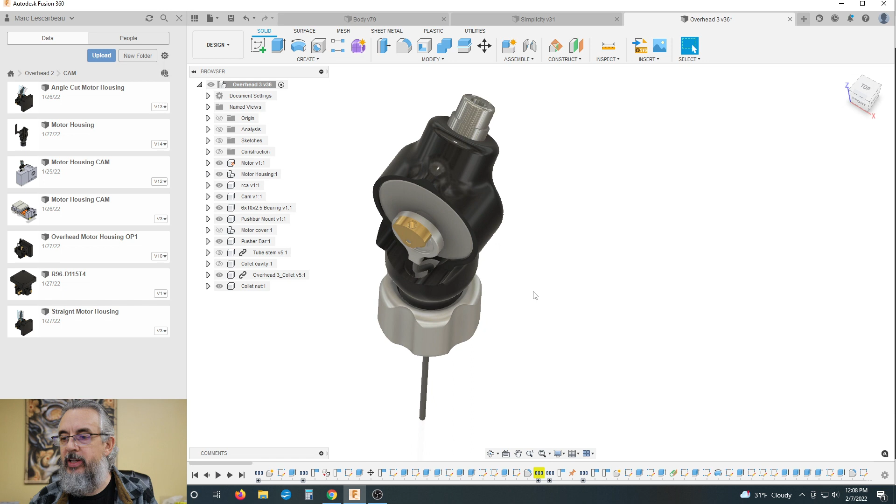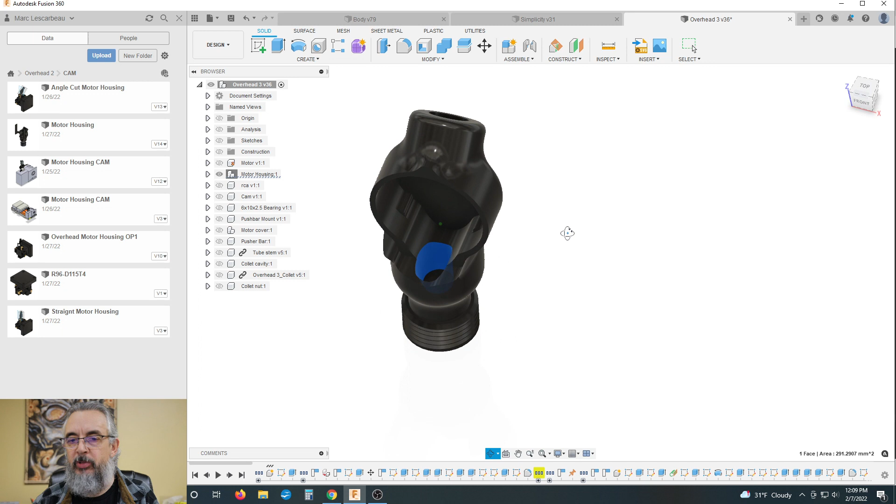So there was another thing I was having where, let me turn this off. This cavity here that I had created, let's just isolate this so we can see better. Okay, so this strange cavity shape here I have going down in there was a little bit of an extreme angle to machine comfortably, based on, I showed you guys, I think, the tombstone.

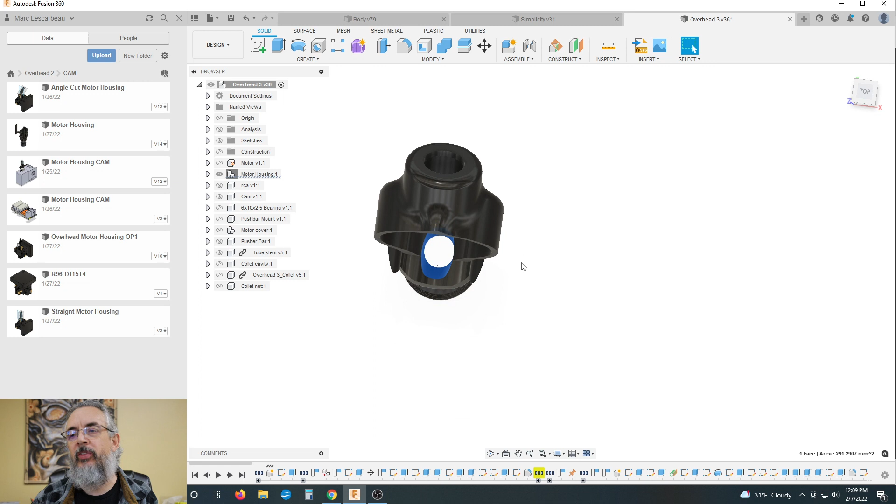It's a four-sided tombstone, which I can hold 4 parts, either 4 identical parts or 4 different parts for the machining process. And what ended up happening there was I was going in at such a steep angle that I was interfering with my ability to place a part on one of the adjacent sides of the tombstone. And because I'm still new to a lot of the fourth axis stuff, I was not getting the tool paths generated that I wanted.

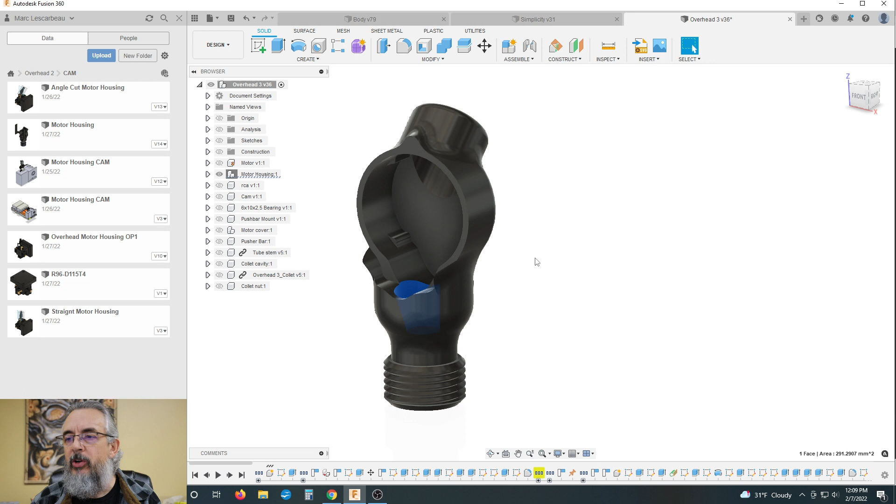So at that point, I just stared at it for a while, trying to figure out what I could do to alleviate the issues that I came across. And well, I went a little bit crazy. What I ended up doing was redesigning the entire machine. Now, everything is virtually the same. I made a couple changes that solve those 2 issues. So let me show you what I did. I came over.

I'm also, just so you can see here, kind of wrestling with the idea of machine name Simplicity. I don't know if I love that idea yet or not, but something that popped in my head. So that may or may not be the name of this machine.

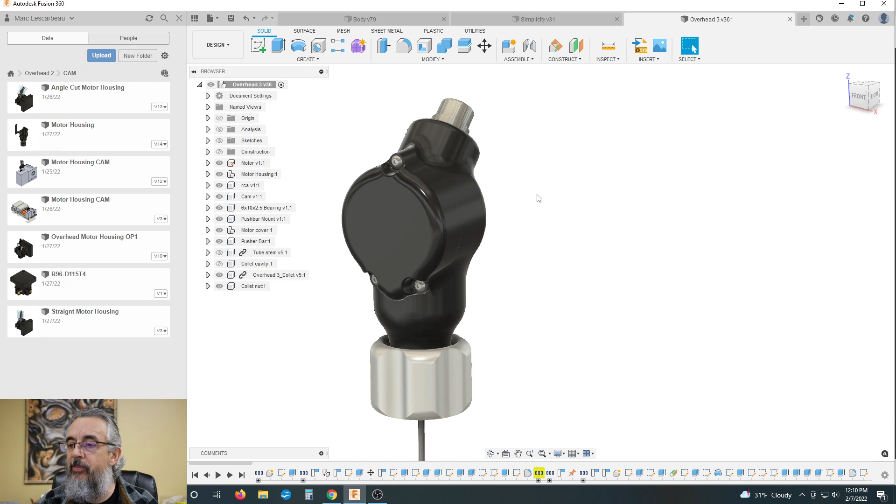Okay, so if we kind of go back and forth here, you can see everything is virtually identical. Same cam, same everything. Very, very close to the same exterior body shape, except for I have this new cover. And this cover is, let's see, a subcomponent of the body.

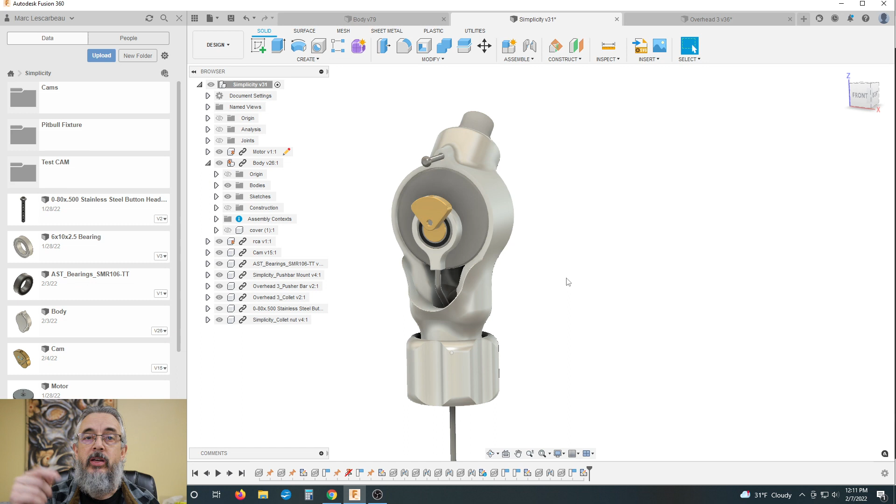And I also went about building this in a more proper fashion where each part is its own entity, and each one of these parts is dragged into this assembly, and you can see these little link icons. So each one of these is linked. So if I make any changes in any of these individual components, they will be reflected in the assembly, and vice versa. I can in fact go in here and edit any of these in place, and that will change the master file off on the left side, just as long as I save.

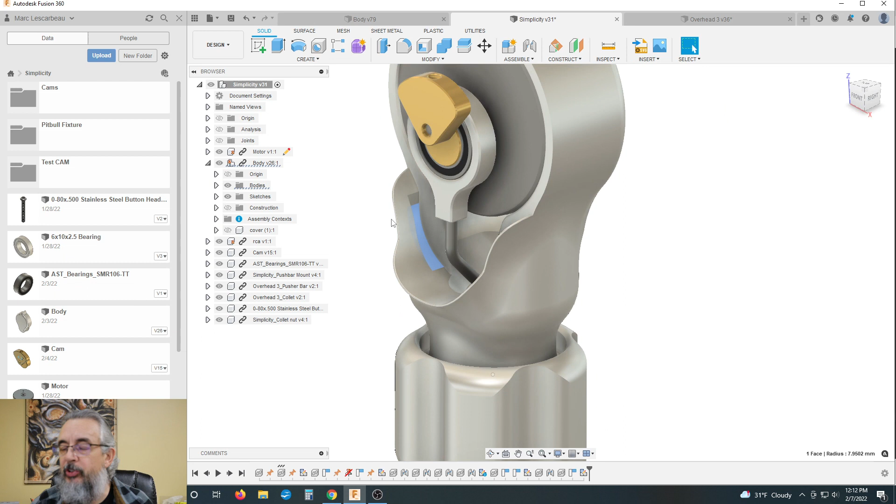Anyway, so what I have done here, it's kind of hard to see, but I've got this little groove down in here. I don't know if you can make it out, but it's a recess. It's a little slot, and basically it might be easier to show you the, can we isolate the cover? We gotta isolate the body, and then turn off that. Okay, so now you can see the cover here.

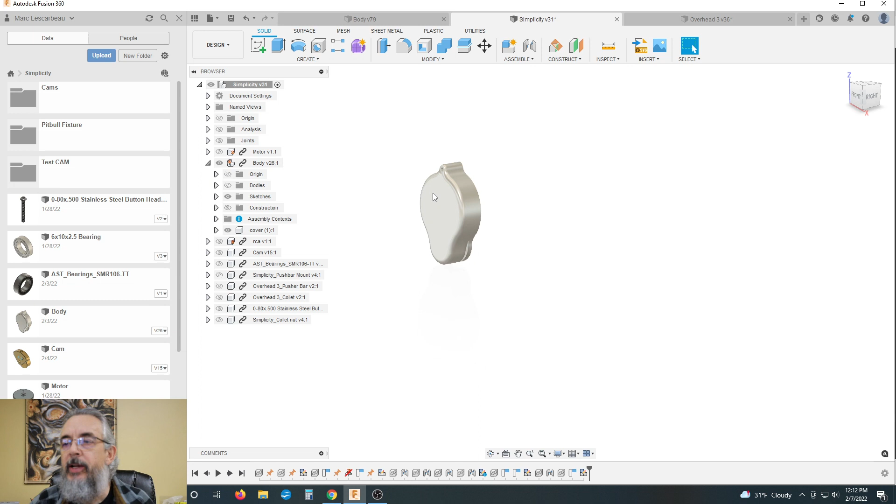So these little tabs, as we'll call them, or extensions, they're going to guide the cover down into the motor housing or the body. I think I'm calling it just a body now. So that's going to slide it down, and that's going to hold the lower part of the cover in position, and then the whole thing can be retained with just one single screw at the top. So that is, in my eyes, just simpler. Less moving parts, less things to buy, less things to machine, whatever.

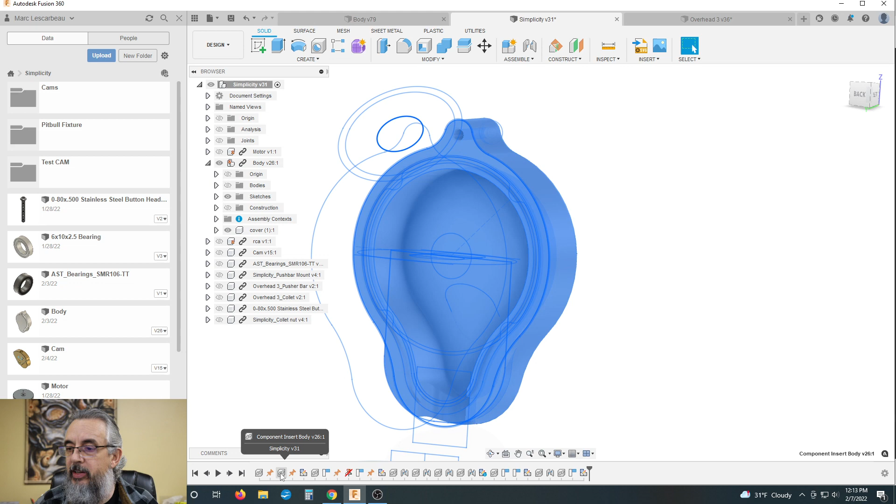And also, I don't know if you're going to be able to see this terribly well here, but this slot here, the wall thickness on the cover is a little thicker. I increased that, and I created this slot that runs around pretty much the perimeter of the motor.

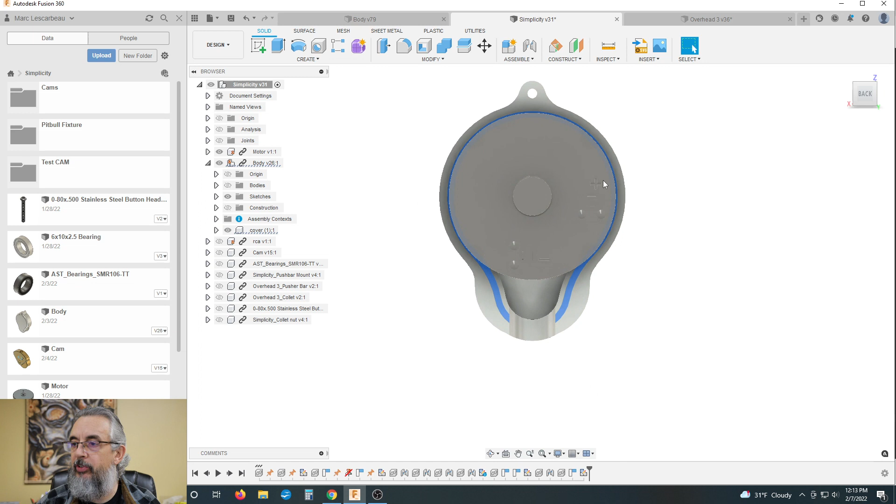I'll pop the motor on there and just show it to you from the back side. So that slot is just on the inside edge of the motor. It extends outward just a little bit, and what I'm going to do with that slot is I'm going to buy some O-ring material.

You can buy that extruded round rubber, I don't want to say tubing, rod, but it's obviously flexible. I'm going to buy that and cut that to length. I can't do a complete one all the way around because we have the push rod bar and the push rod moving up and down, so that would interfere with that.

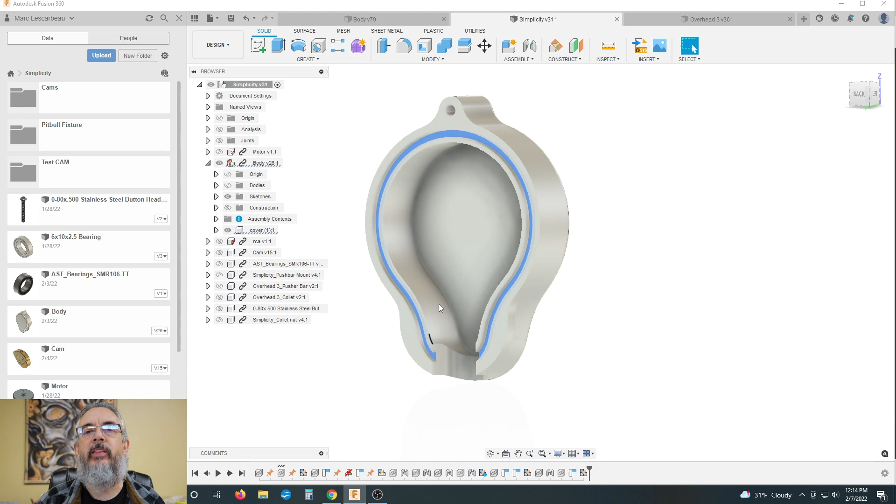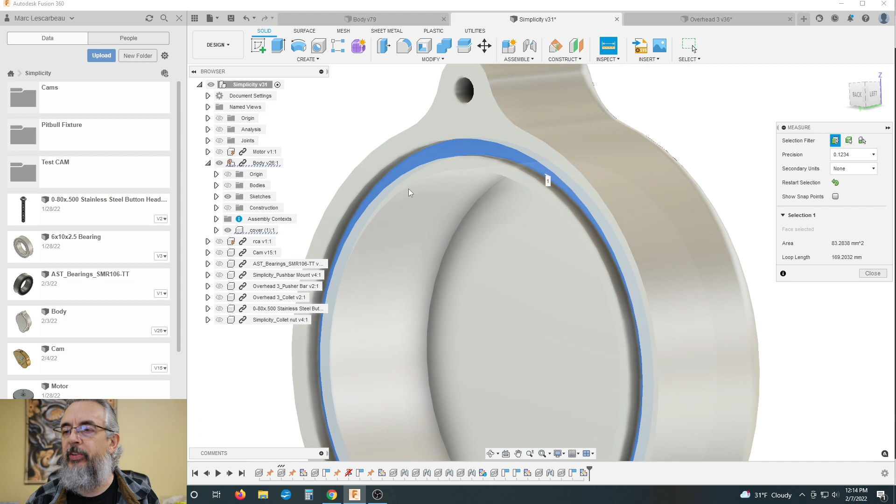But what I'm going to do is cut that to length and press fit it into this slot with the O-ring material sticking out the face of that just a few thousandths, probably 5 thousandths, 8 thousandths, in that neighborhood. I can't remember the exact depth. This will probably change once I get the part made, but right now I have that set to 0.9 millimeters deep. I'm going to buy 1 millimeter material, so that's going to leave 0.1 millimeters of O-ring material sticking up

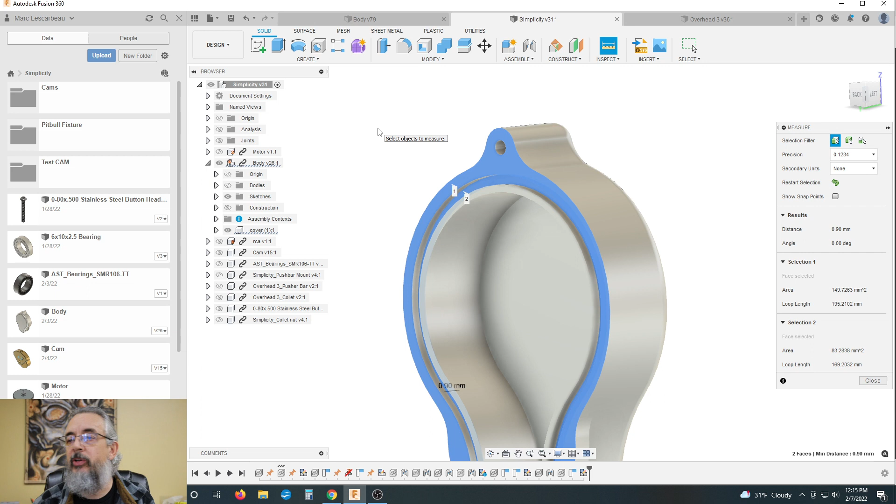out of the housing. That's going to press directly on the face of the motor, and that's 0.1 millimeters, about 4 thousandths, roughly the thickness of a sheet of paper, and that will compress as the screw is tightened down in the upper hole. So that is going to stabilize the motor within the housing now. The motor cannot rotate due to the tab feature that we put into the housing or the body itself.

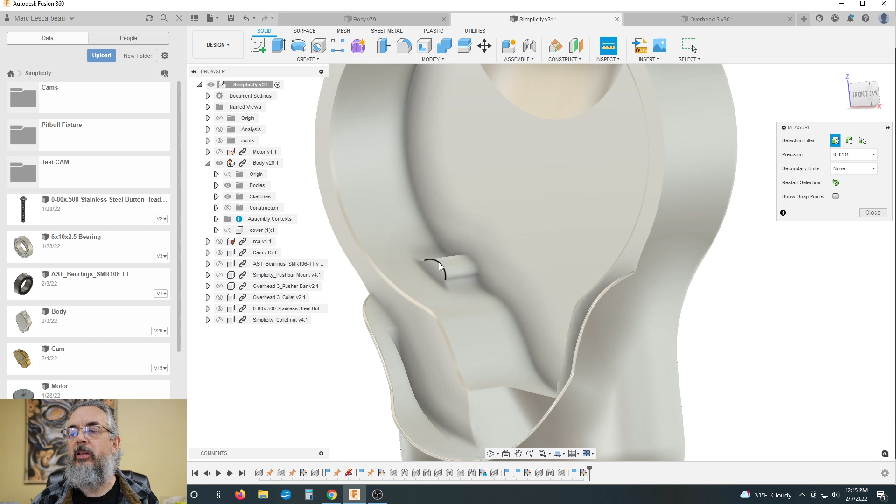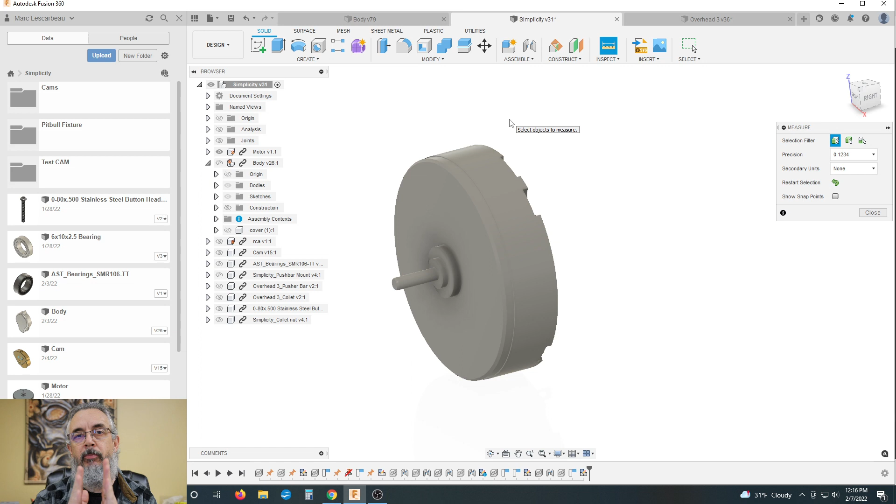These little risers not only hold the motor up off the back of the housing, but they also interact directly with these little recesses in the back of the motor. So those tabs will keep the motor spaced off the back of the housing, keep it from rotating, and then the O-ring gasket pressing on the front of it is going to hold it in place, completely stationary.

So without any additional fasteners, screws, or bolts to hold the motor down, all those problems are solved. I've isolated that in time and space right there, and it theoretically should not move. And I can adjust the pressure on the motor by just changing the depth of that O-ring slot.

So that's it. I did make some changes while I was not recording because I was home and I don't have this whole recording setup at the house. So hopefully you guys like what you see here. I think it looks a little cleaner, a little more streamlined, and a little easier to manufacture.

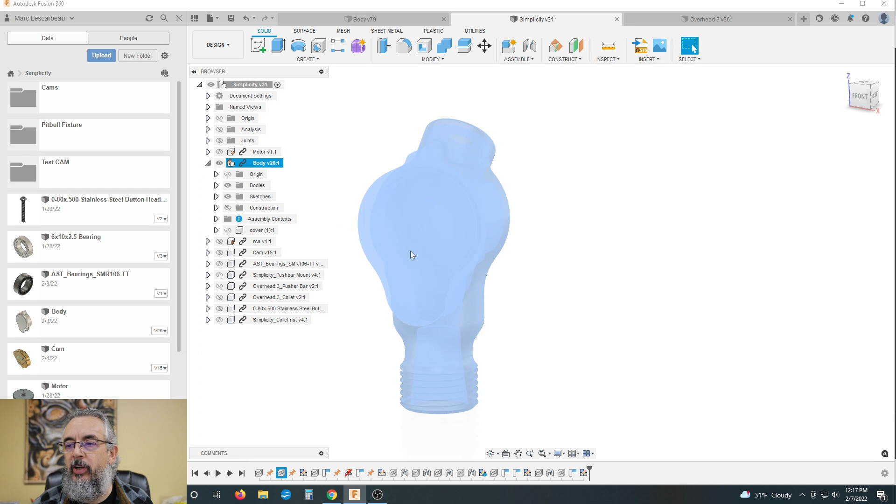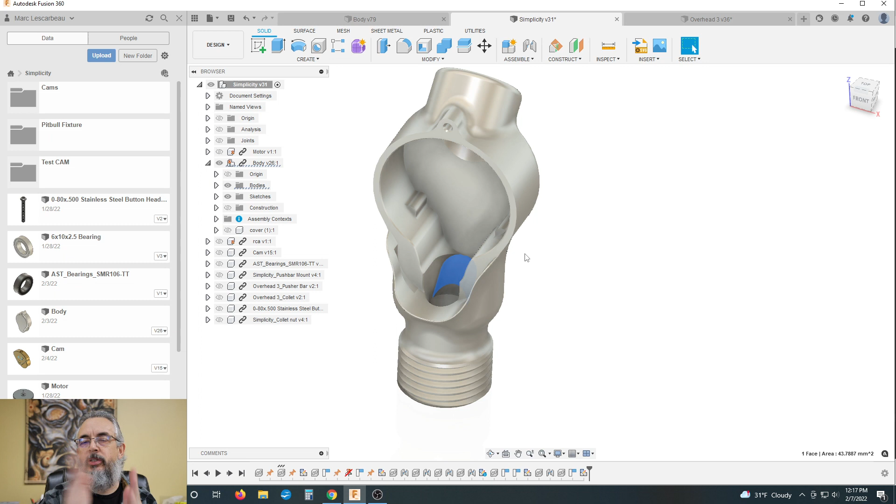Actually, let's look at this one more time without the cover on. You can kind of see I went with a simpler feature here for the clearance for the push rod mount and push rod to go down. This face here is 45 degrees between the vertical and the horizontal faces. 45 degrees is an easy angle to access without creating too much problem with the tombstone setting. So that's how I resolved that.

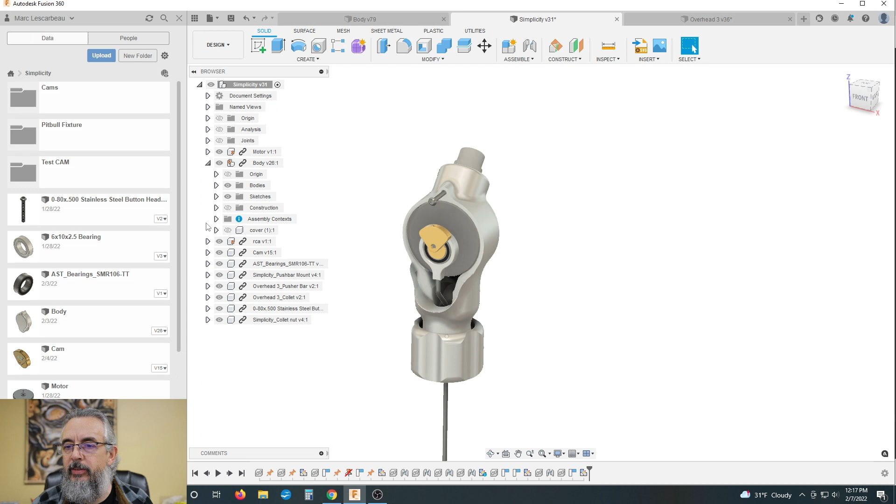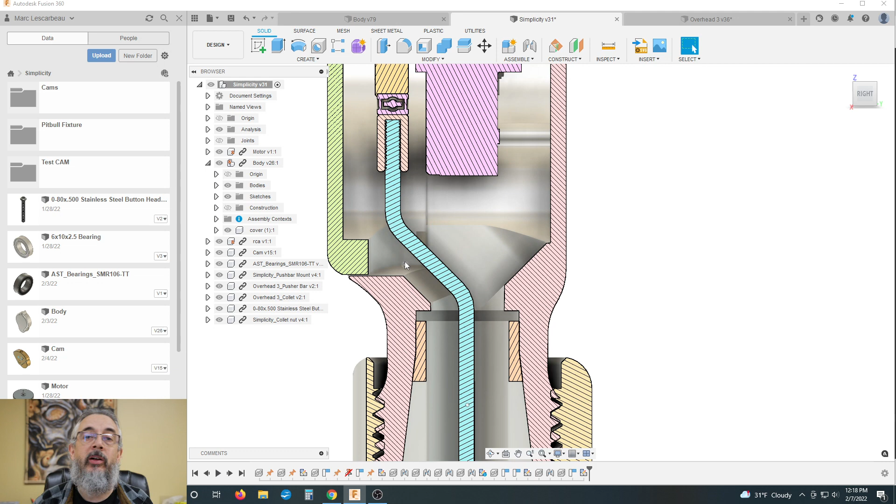And let's see. Isolate all, everything's back on, covers on. Let's look at the side view and turn on the analysis. You can see that the 45 degree angle slot here, because I have a 45 degree angle bent into the push bar, is fine. And the cam in its fully downward stroke leaves me a good millimeter and a half, or closer to 2 millimeters, of vertical clearance. So there's no chance of anything hitting or binding on that.

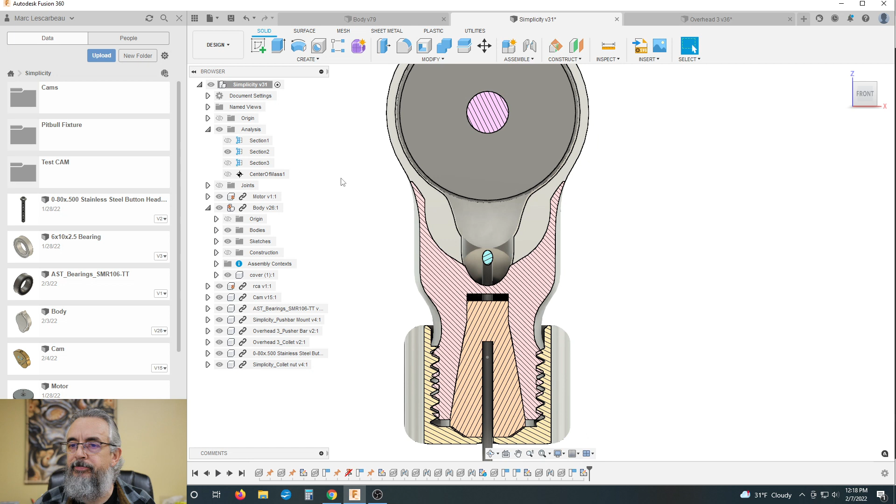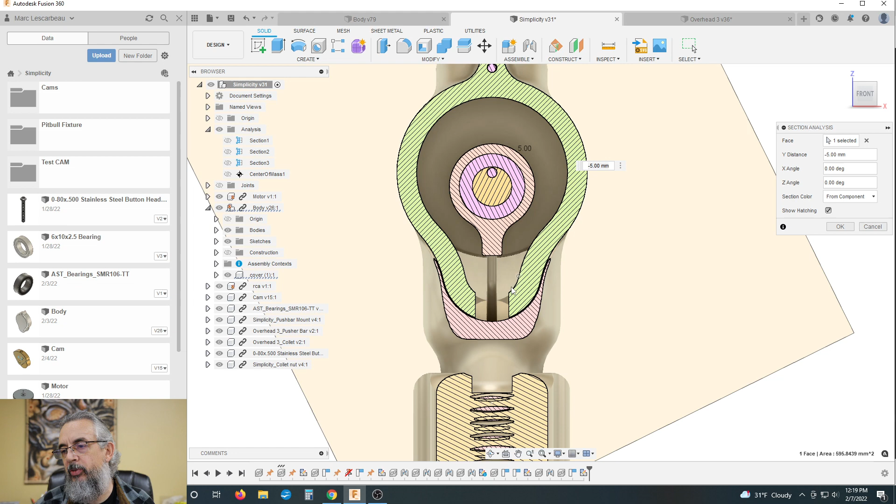And what's the other sectional view I have? From the front, you're not really going to get a good look at that, but I can quickly create another sectional view based on that feature, and that's a pretty good look there. So the bar, even when it's far off to the side over here, is going to have plenty of clearance coming down at this angle and this angle, and should be just fine.

So that's what I've done. I've made a few modifications, but all the mechanics are basically the same as where we stood. Everything I've done is mostly visual, other than the slotting mechanism to retain the lower part of the housing or the cover, instead of having all the additional bolts and holes to drill and tap and parts to purchase and lose and more things to go wrong. I like things done simply.

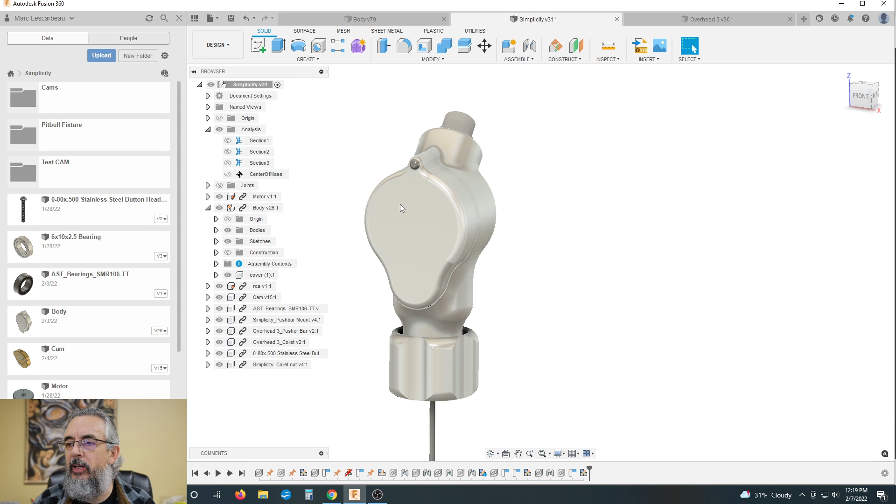So now, let's take you into the next step. All right, I started mocking up some of the stuff before, but this is where I'm at at this point in time.

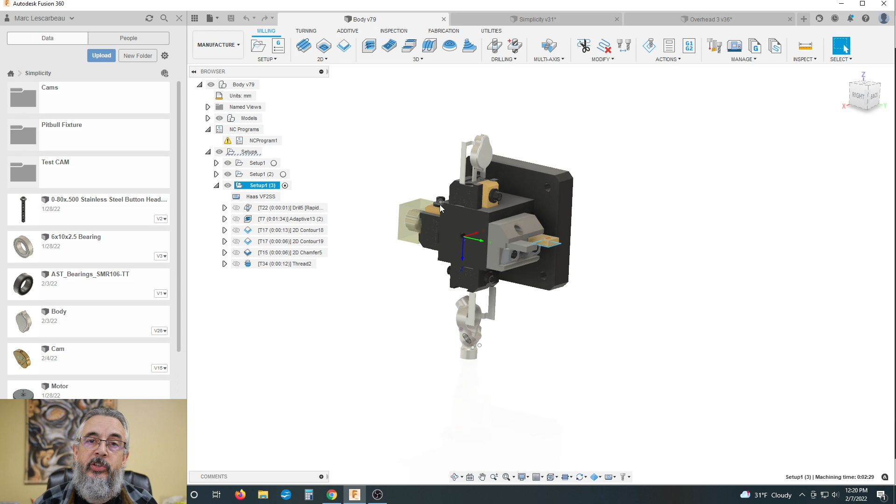Strategically planning to machine all 5 machined components for this machine in one setup on the new 4th axis rotary and tombstone. In order to do that, this only has 4 sides and we have 5 parts we have to make.

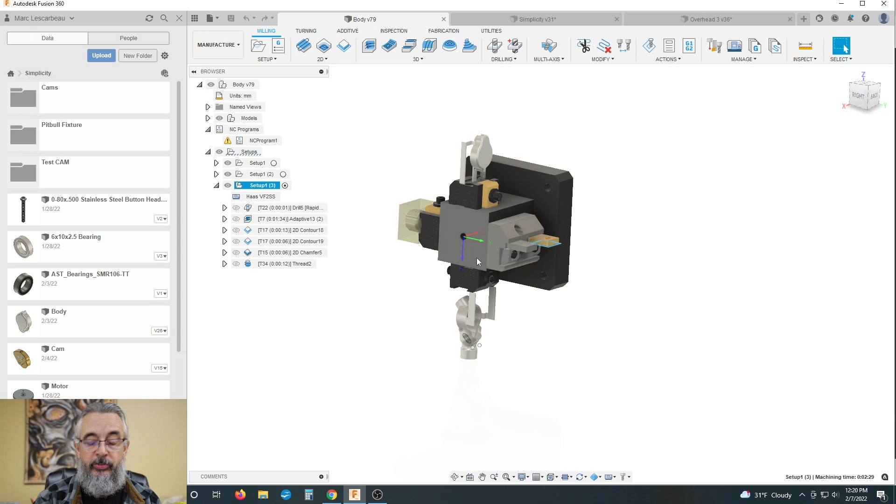Well, 6 parts because the pusher bar needs to be made, but that's not really a machined part other than the threading or the press fitting or however I want to attach those down the road. But that is really buying 1.5 millimeter rod in a hardened state, and that's going to be done with a small tool that I'm actually going to build to put the proper angles and cut to length.

So those are all identical, and I may have to make a couple different lengths of those based on different manufacturers of tubes, but I may or may not. I may just support my own tubes and products, and then that's that. If people put up a big stink, then I may make another length of pusher bar. But my job is to work around the things I manufacture and some industry standards, but not to bend to other people's or other manufacturers' wishes.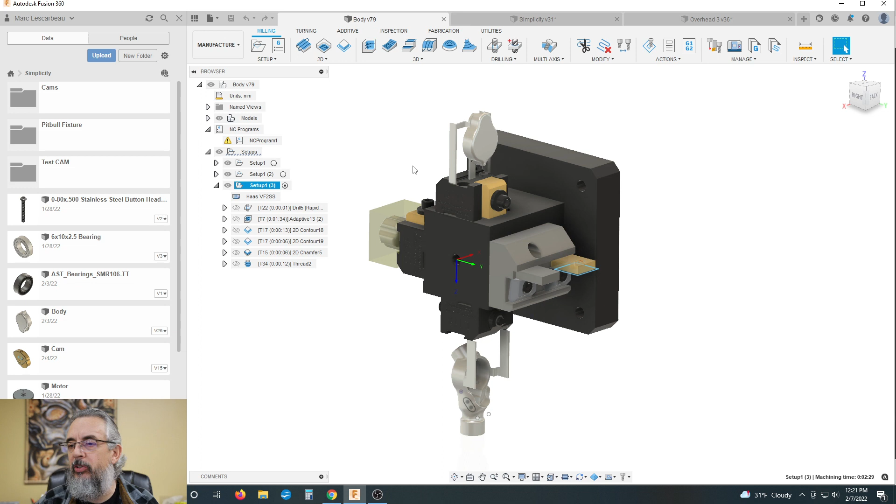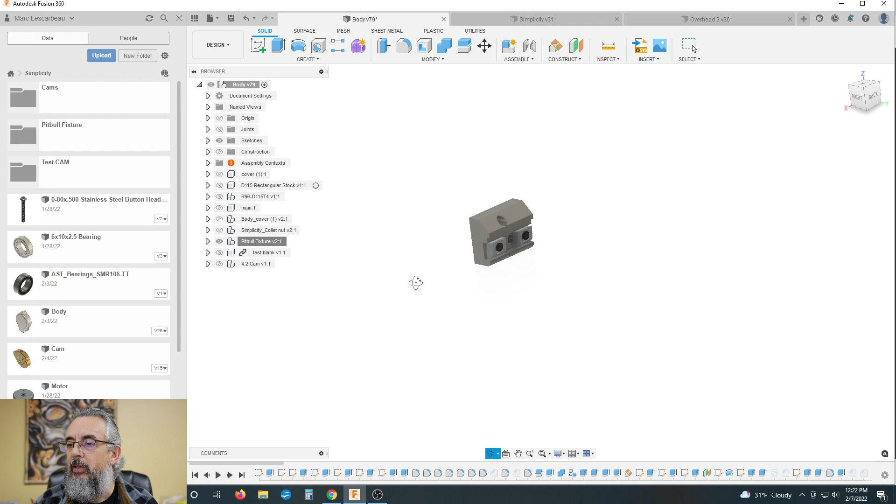Anyway, so this is what I've done. I've actually removed one of the dovetail vices from one side of the tombstone. That's easy enough to do. Let's see, go into the design phase here. And what I've done here is I've built this component here. I haven't built it yet. I've designed it.

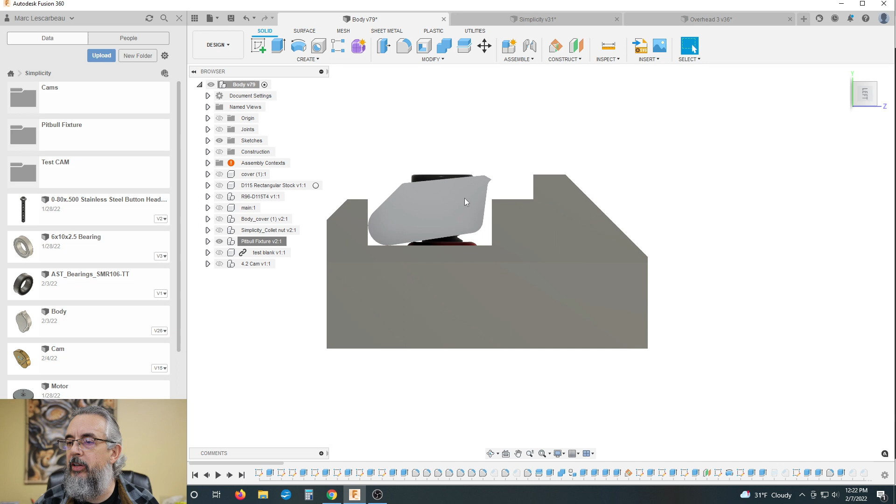These are some little clamps, super powerful, strong little clamps called pit bulls, made by a company called Mitee-Bite. I've been using their various products for years, and what you see here is a downward force, and it basically compounds the angular, uses leverage to put into the part that's being held. It has a knife edge. It's actually going to dig into the material that I'm holding.

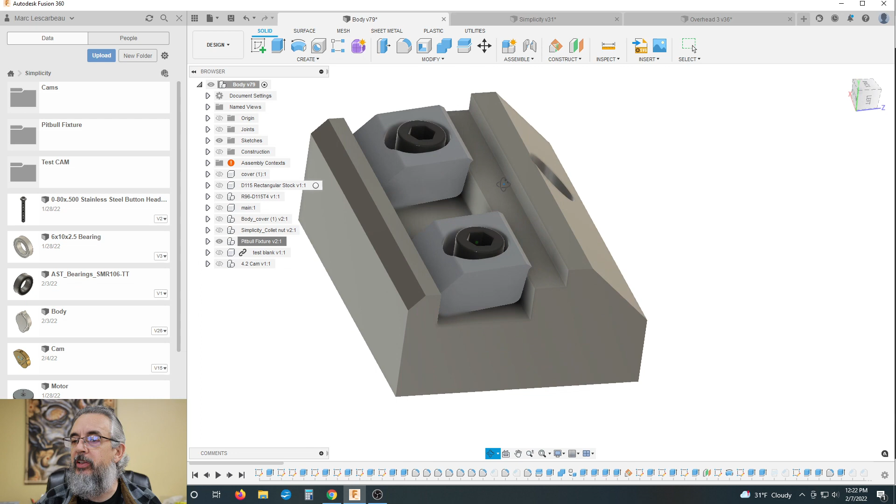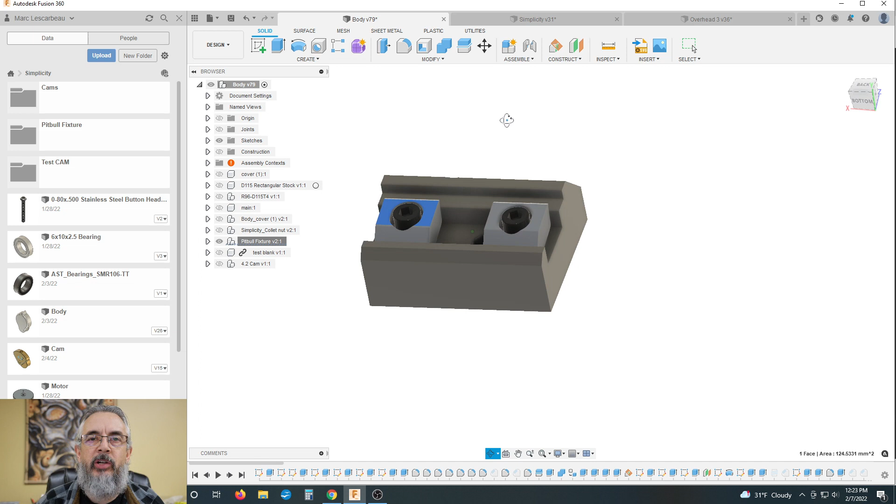Basically, I will maybe put in a couple dowel pins to indicate these, because I think I'm going to use 3/4 inch material on these. But I don't really need to, because these faces on these pit bulls are 3/4 of an inch, so I can quickly indicate raw material in there, close enough for government work. The way I plan on cutting those, it's not going to make a big difference whether it's 10 thousandths off one way or the other, or more, because I'm going to be cutting out of the center of the material anyways. So that's what we've done there.

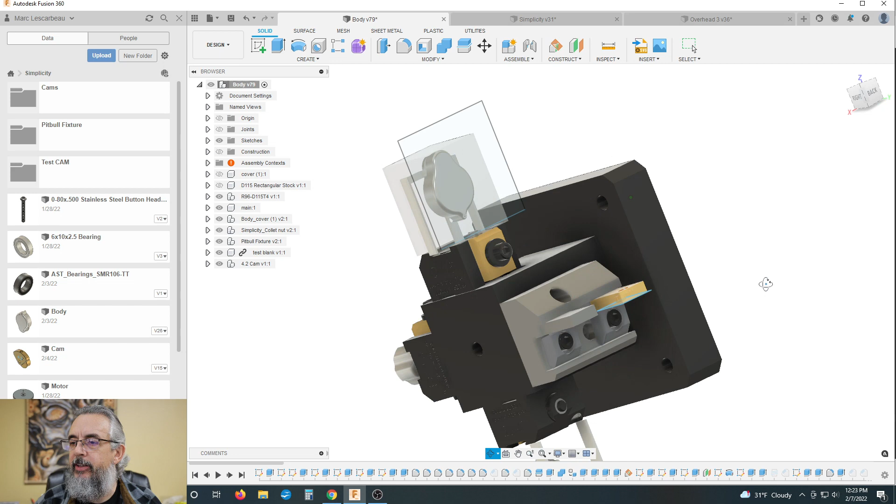Turn everything back on, and you can see I've created the various raw stocks that I need, the right sizes for each component. I have them spaced off of the dovetails far enough so I can machine all the way around them without cutting into my fixtures. A couple of these are turned off, so you just see a part hovering in the area. But if you could just picture another block like this, a little shorter over here, and that's what you get there. You've already seen what I was kind of doing in the last video with the block for the body, which is the most complex part of everything.

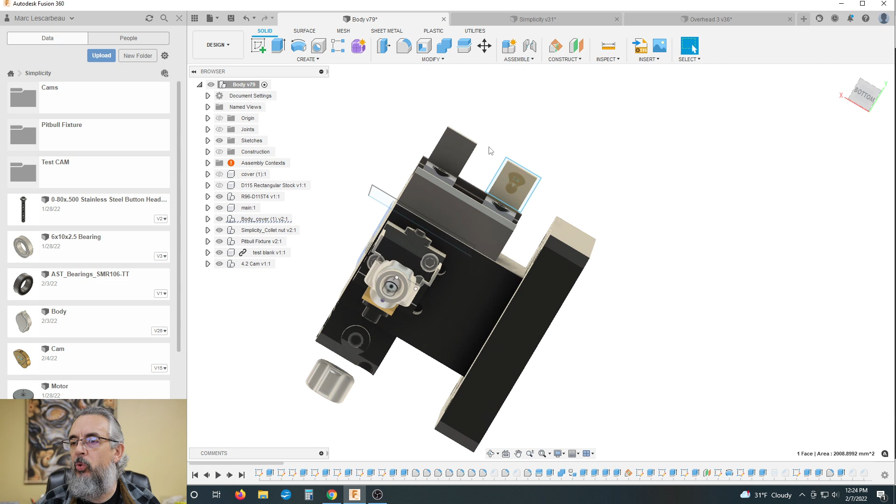And then this will hold the brass raw material for the cam and the aluminum raw material for the push bar mount. So basically, I will set up all 5 components on the tombstone, and in a 2-jaw vise next to that, I'll make some soft jaws that will hold the 3 blocks of aluminum that I'm going to use for the body, the cover, and the collet nut.

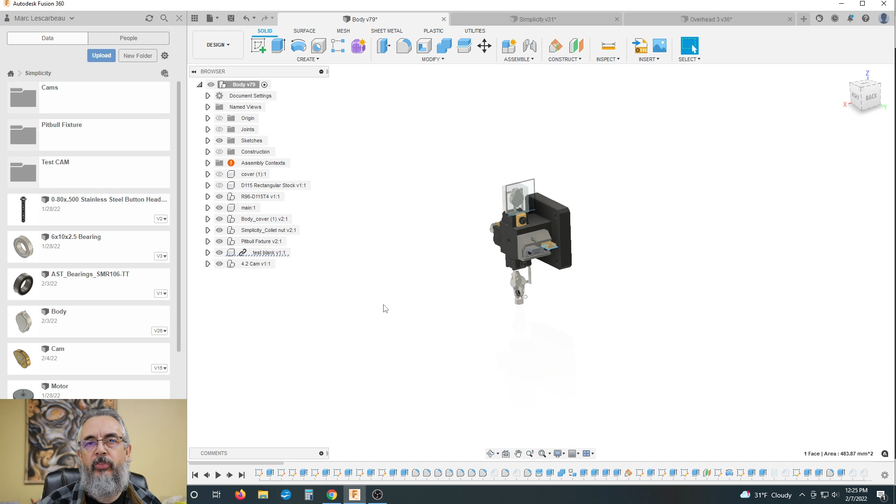So those 3 components will be held vertically, and every time I press go to start a cycle on the machine, the tooling will come in. It will cut the dovetails on the raw blocks so that those parts will be ready to go into the dovetail feature on the next cycle. And then the raw material that is in the dovetail, each one of those will be completed, all machining operations completed on those features in that one cycle.

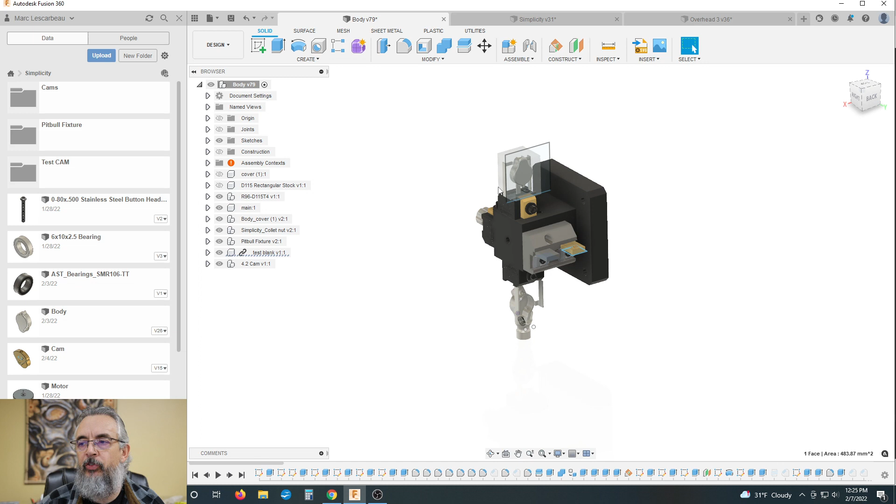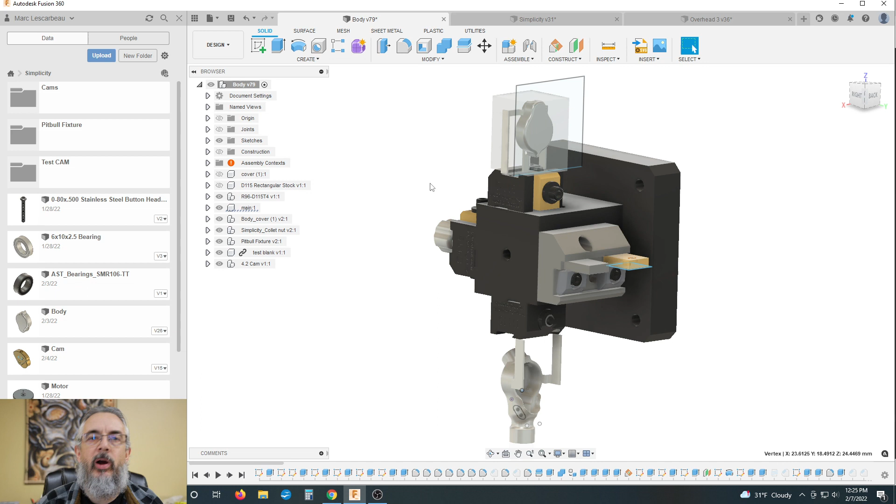So every time the operator opens the door of the CNC, first thing they're going to do is snap off each of these components off of the tabs and the arms that we have left in there. There'll be tabs on the smaller components too. Positioning these tabs in such a way where they're going to be so minimal that it's not even going to require another machining process after this is done, because all of my tabs are going to be done on flat surfaces.

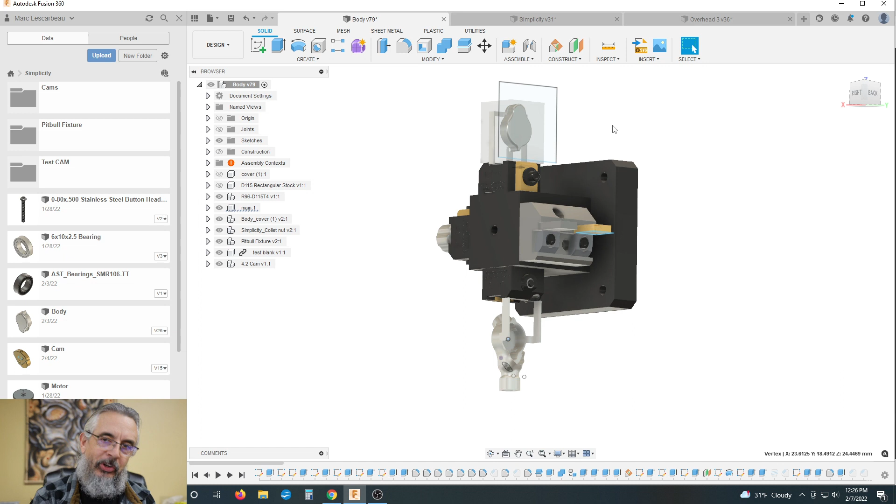Basically, next to the machining center, we're going to have a piece of perfectly flat glass and a very fine emery paper, because I'm only going to have a few thousandths of an inch of material, just holding the flat surface on that emery paper and very gently sliding it around and looking at it until it's smooth down to the basic flat surface. And then those parts will be completely ready to go into the vibratory tumbler, tumbled, sent out for anodizing, and eventually assembled as a machine.

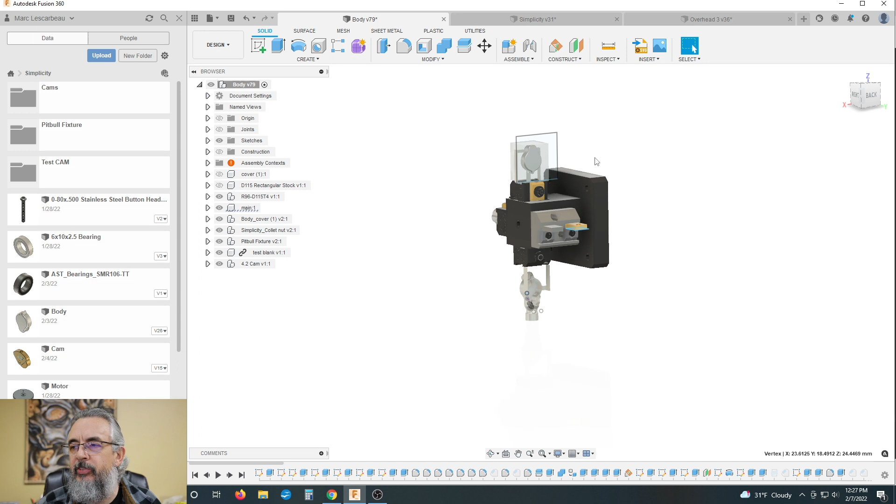But what I like about doing it this way is every time the machine runs and shuts off, there's enough components, other than the actual bending of the pusher bar, to assemble a complete machine. I'm just sort of guesstimating the run cycle time to be about an hour-ish. Could be less if I really get into detailing the operations and optimizing those for best speeds and feeds, which I will do to some degree, but I'm not going to worry about saving 1 to 2 minutes on a cycle time. I'd rather just ensure better tool life and less stress and wear on everything involved.

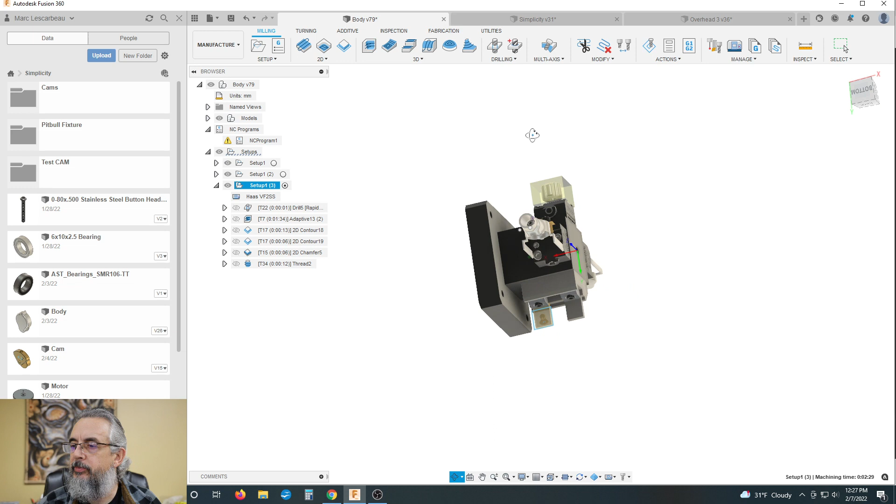So, but let me show you now a little bit of what I was talking about here. It's the best way to look at this. Let's get this roughly at 45 degrees here.

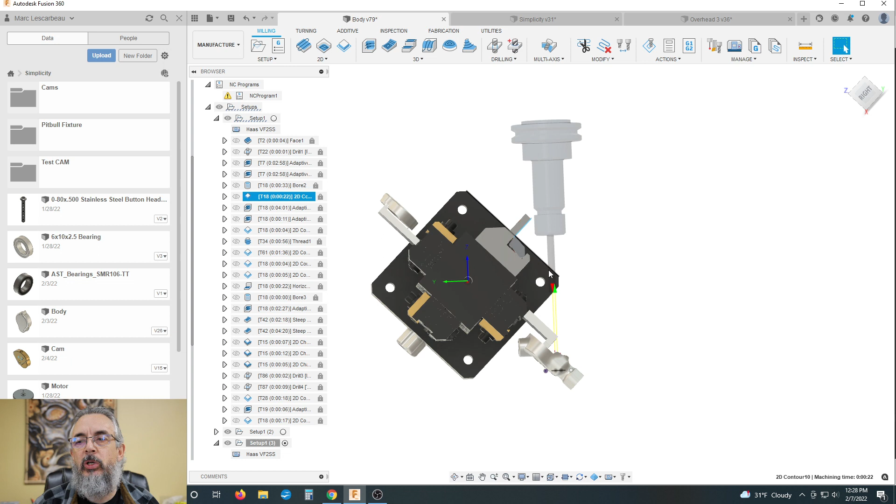Okay, that's approximately 45 degrees. Let's open up this first operation, and I believe this is it. Yeah, this is the tricky one. I've actually had to order some special tool holders. I've just placed an order for a few more $1,000 worth of special tool holders and very special tools to be able to make these components all in one shot.

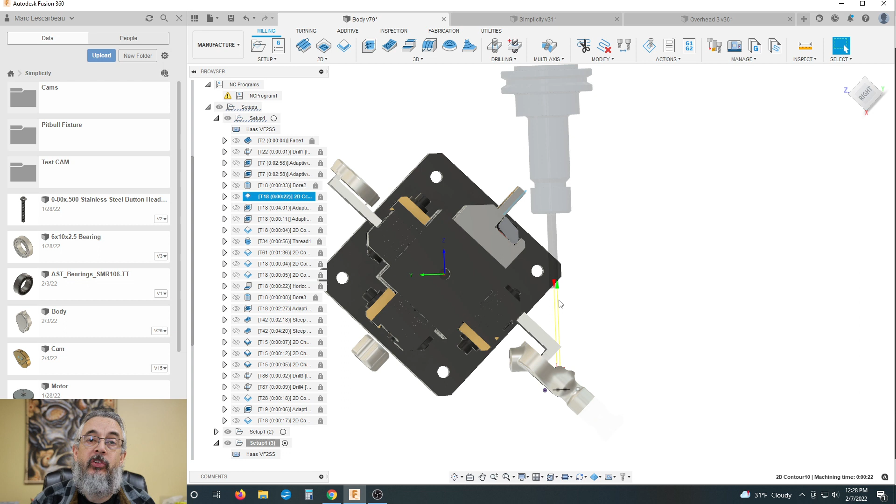So special cutters, undercutters, reverse radius, like underside radius, and kind of specialized stuff. But you can kind of see here that this tool, when it comes down to cut out that 45-degree pocket, that relief I was talking about for the cam action, 45 degrees is about the maximum angle. It is the maximum angle that I can come in and not interfere with parts that would be on this tombstone.

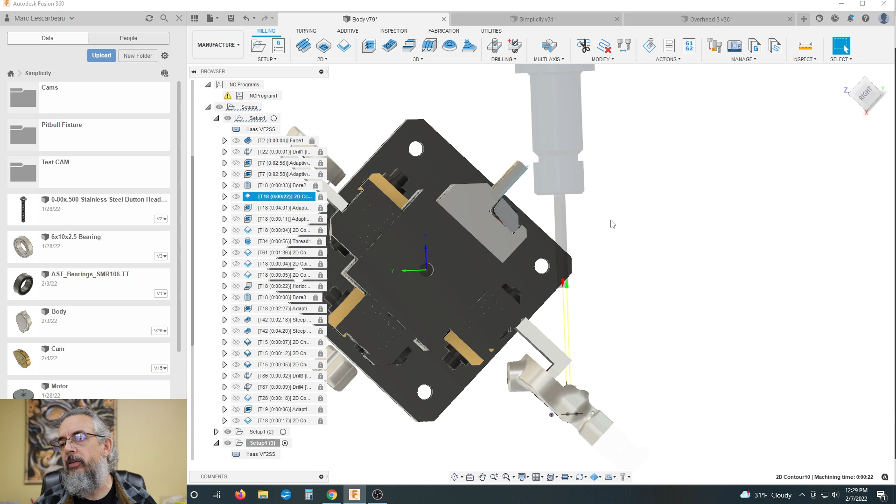In fact, if I was still using the original tombstone, it's actually a little taller than that, and the parts would be extended up even higher, so that wouldn't be possible at all. And I would only be able to hold one part. If the parts were made of the same material, I could cut 2 parts out of 1 block of aluminum there. But I want the cams to be brass. So they get a little more inertia, I think, when they're swinging, and they have a little bit more of a dampening effect on impact, which reduces the impact to the bearings and the motors and things like that.

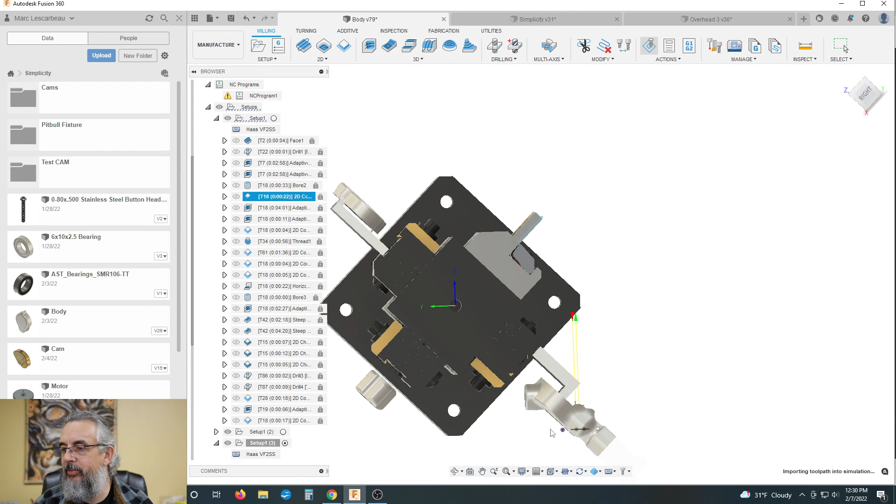But you can see this is a tool that I physically already have, which would be a 4-inch length tool holder. And then I think I'm using a very extended 2-inch length stick out on this tool, and that's not enough to reach that pocket and machine it properly. In fact, I can simulate that here quickly. Let's see. There we go. It's generating. Okay, so let me turn the speed down slower here.

And you can see this tool's going to come down, and it would be physically hitting the other parts. And this is even with the fixture that I made, which is a lower height than the traditional fixtures. So what I needed to do is instead of getting 4-inch extended tool holders, I ordered some 6-inch extended tool holders, which raises the base of the tool holder up 2 more inches, and that will get me adequate clearance to get in here.

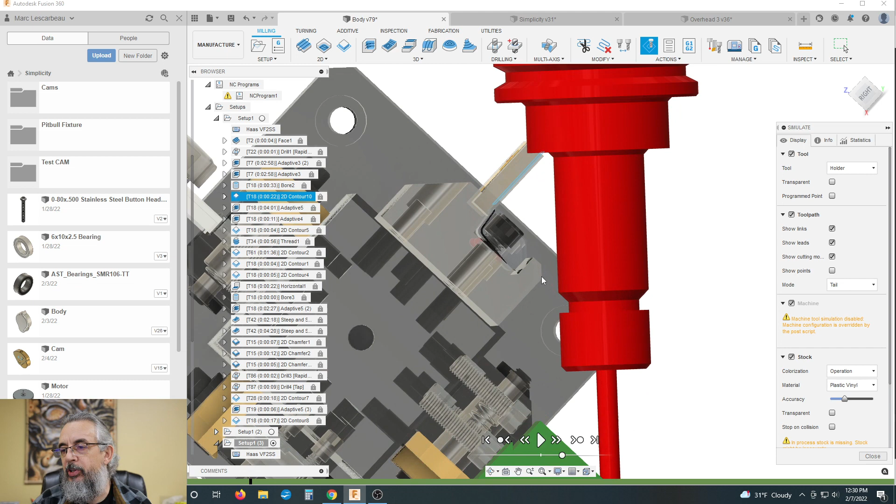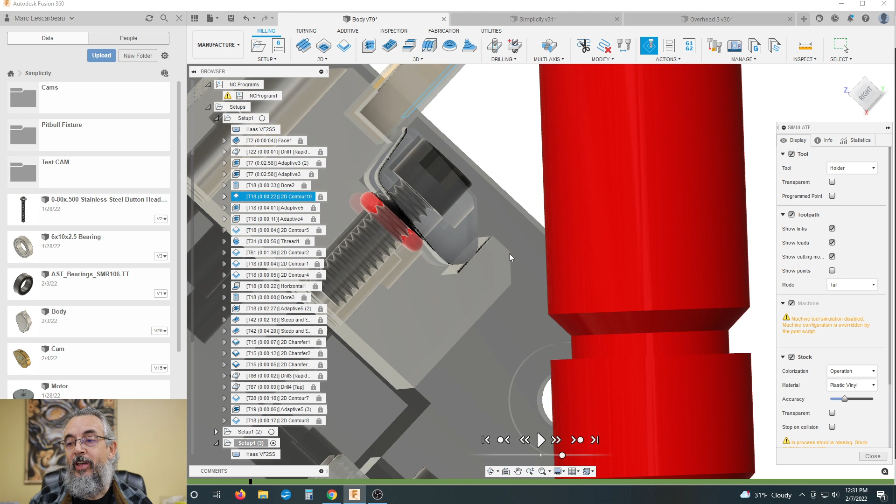But you can see when this tool holder comes down, this is really just a few millimeters, maybe 4 or 5 millimeters tops. So it's less than 1/4 of an inch, probably 3/16 of an inch between this tool holder and this fixture that I made to hold these parts. And that's one of the reasons I actually machined in this 45-degree chamfer on the face of this mini vise that I'm making, is for clearance, because other than that, it just physically would not work.

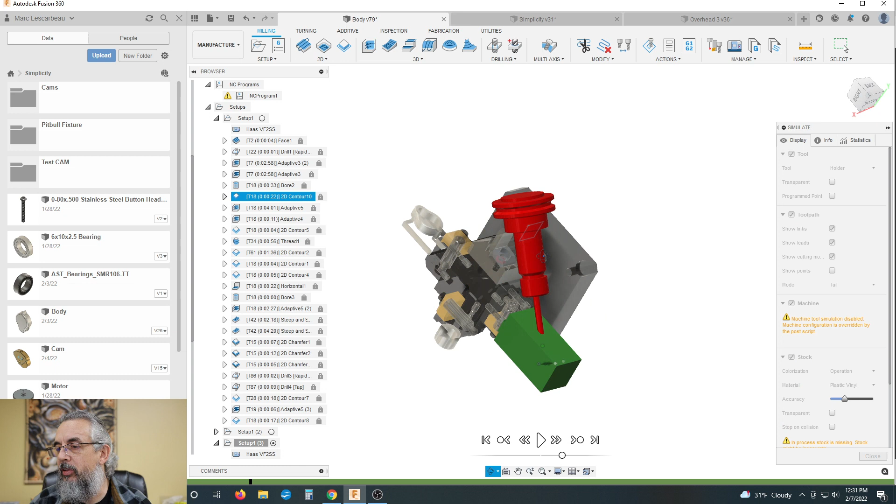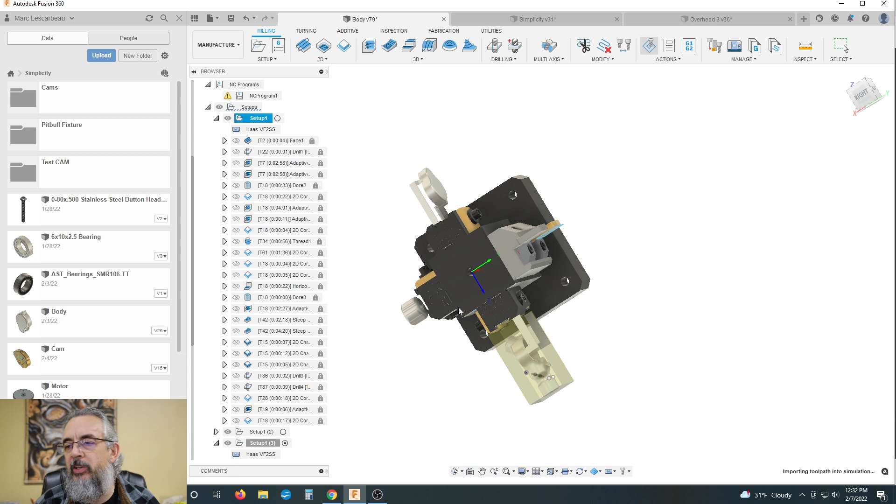What I would end up doing is having to not use that side of the tombstone, and that's kind of ridiculous, because it just doesn't make sense. Why would I not utilize items that I've purchased? So that is how that goes. So let's just quickly get into a quick simulation. You can see I got locks on all these operations because I didn't want them to change, because I've got it pretty much where I want it.

Get a good viewing angle here, maybe. Okay. And you're going to have to understand that in the real world, this whole tombstone would be rotating back and forth to change angles, but the simulator just makes the tool move around the part, which is only half true. It will move up and down, but the table itself will move forwards, backwards, left, right, and rotate. So it's just strange that it simulates it that way.

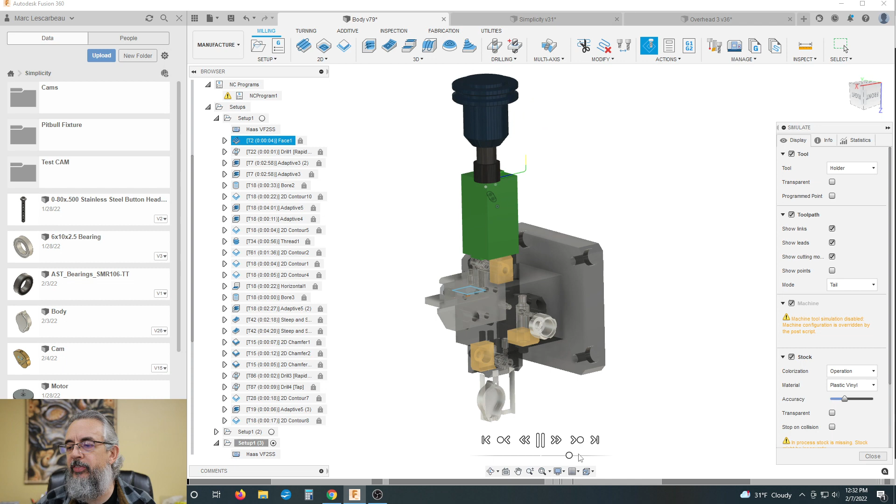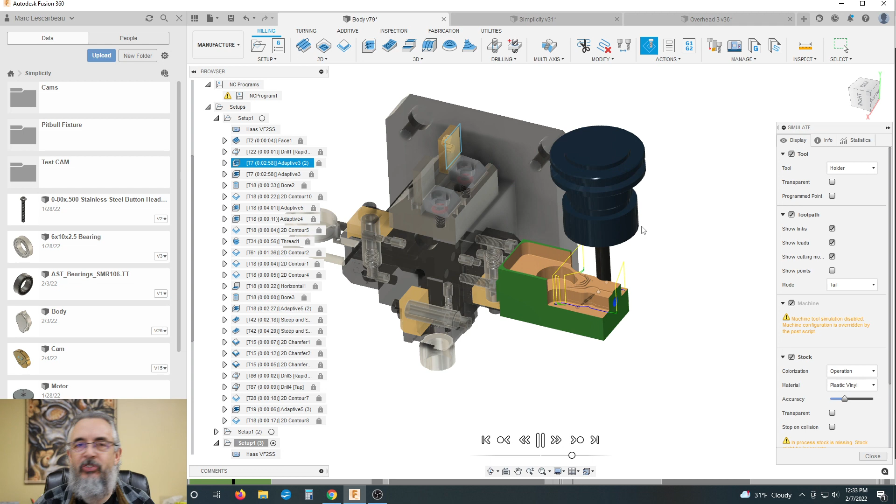So, okay, let me speed this up a little bit. If not, it takes quite a while to produce here. And this is pretty much the actual tool paths that I've programmed up to this point. And it's a lot of fun to watch this, to be honest with you. Because you think about these things in your head and you're like, all right, I can visualize this, but to get the visual confirmation from the simulation is always exciting.

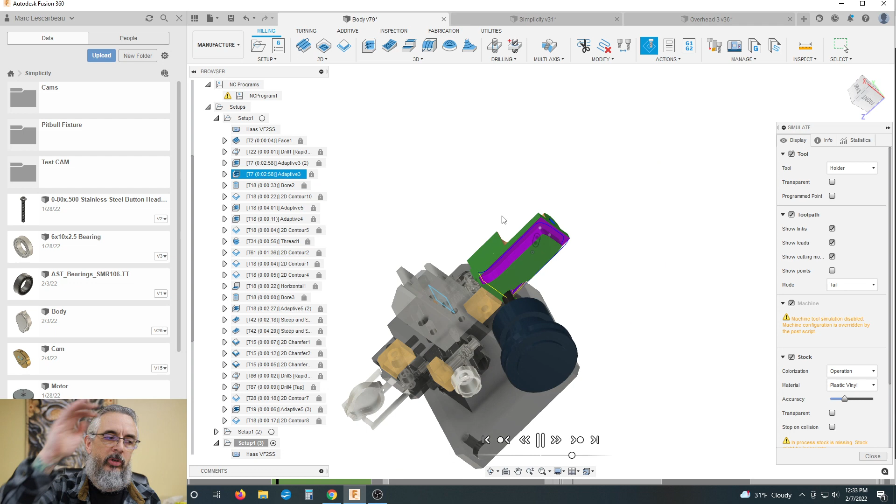All right, I'm going to flip the part over a little bit because it's going to start to cut from the other side here in a second. And again, the whole tombstone would have rotated 180 degrees and moved further back in the machine so that it could cut from the other side.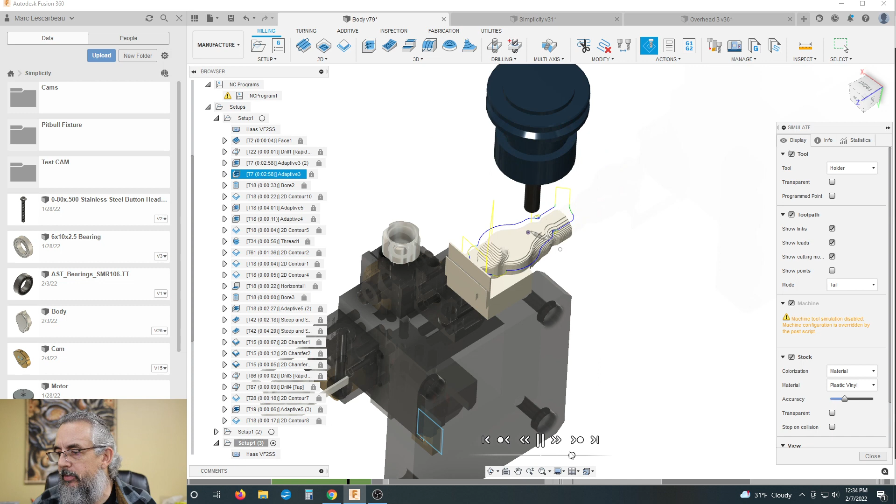I'm going to change there, we'll make it look like it's cutting right out of the aluminum there so you can get a little bit more accurate representation as to the finish on the part as it comes off of the machine. And I'll speed that up just a little bit more.

Okay, you can see after the first operations, we've got a tab on the one side, a tab on the other side, and because I used a large tool, it couldn't cut behind here. So it leaves an involuntary, well, I can't say involuntary, it was a planned third tab in the bottom that will be removed during these operations next.

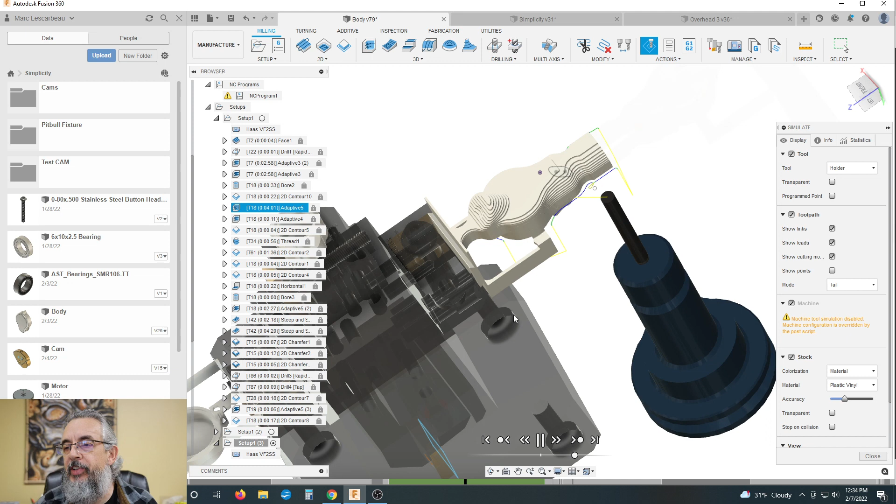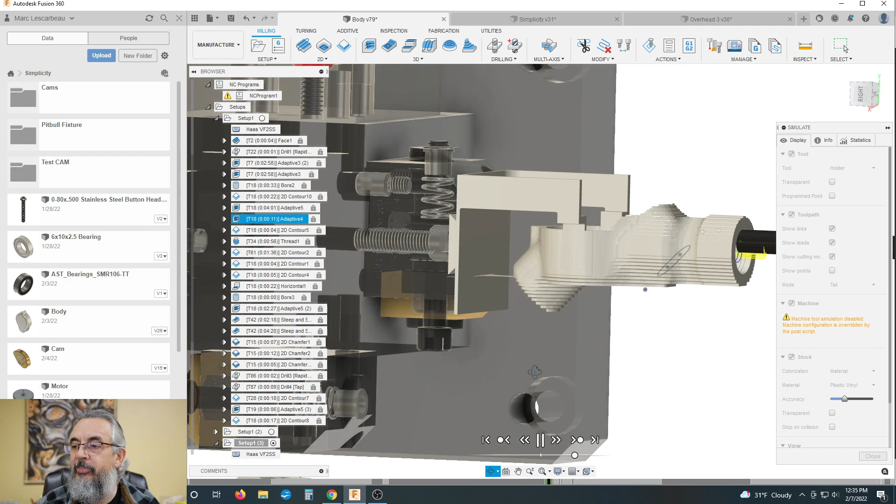So now because I'm removing most material from the other side, you can see I've thinned down that tab, but I'm going to leave that little bit on there until we're virtually down to nothing left to be removed from the other side. Okay, so these operations will be coming in, working the end, cutting the threads, chamfers, all of that. And okay, so now our third tab has been machined off the front.

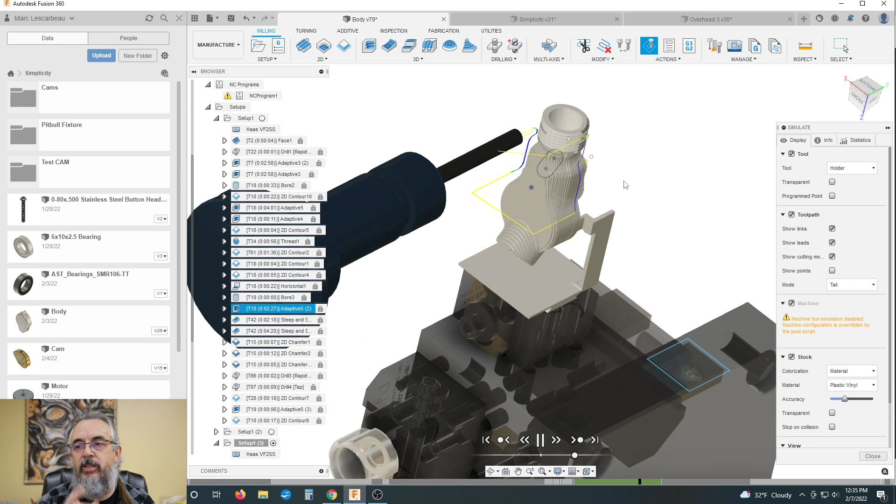So for the rest of this, I'm taking really, really tiny cuts, thin depths of cuts, and really going to just do the finished contouring on the machine. Here we're working with, let's see if I can stop it. You can see the end of the tool is round here. It is a ball-nosed end mill, and this is what's going to be used for the final. Ooh, all right. There we go. So this is what's going to be used for the final contours on the machine.

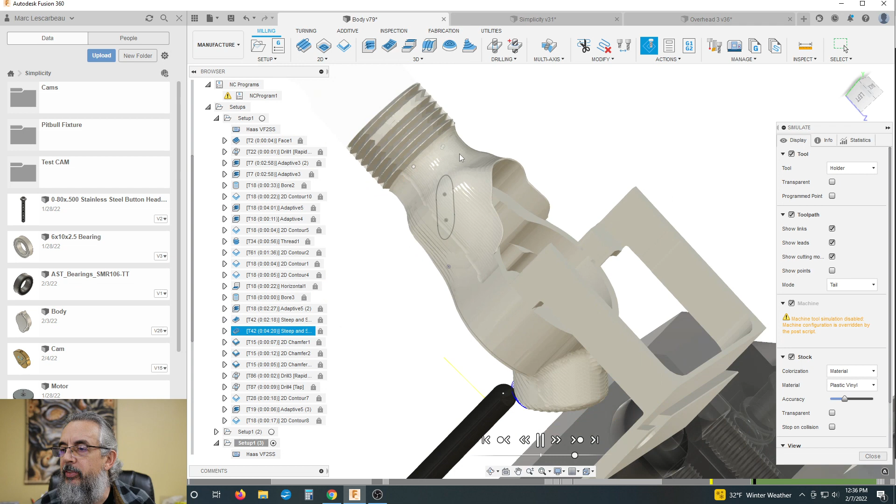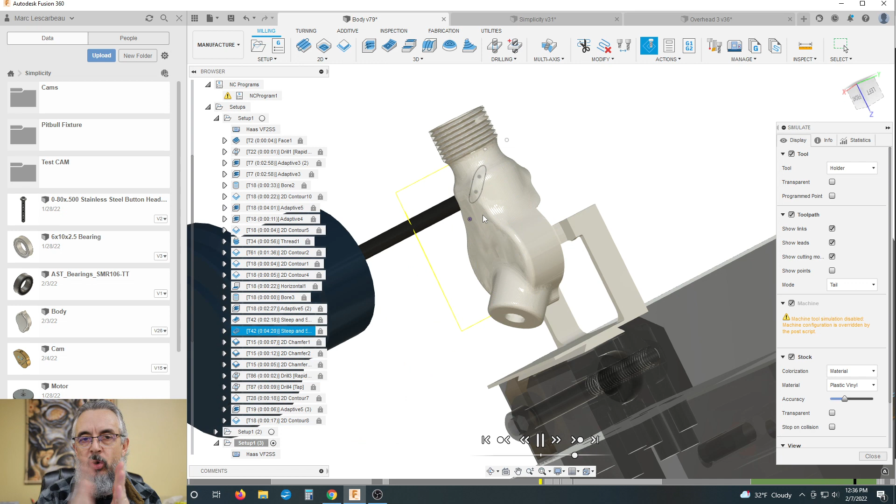And the simulation leaves a little bit of what they're called cusps. But they're going to be barely visible to the naked eye. And once the parts come out of the vibratory tumbler, there will be nothing left. If there is, then I will change my tool path so that the tool paths are offset by a smaller amount, leaving smaller cusps so that it does come out better in the finished assembly.

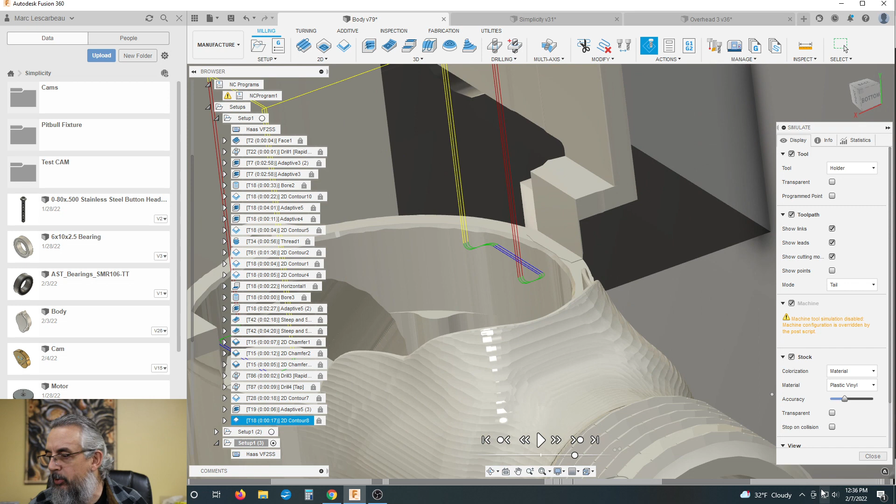But let's see here. What is this? Oh, and then the very last operation in this is I come down and I'm going to back this up just a tiny bit. Okay, you can see these tabs are pretty thick and healthy here at the very, very end. And there's a tiny tool that comes in. It just removes the tiniest bit of material out of these corners.

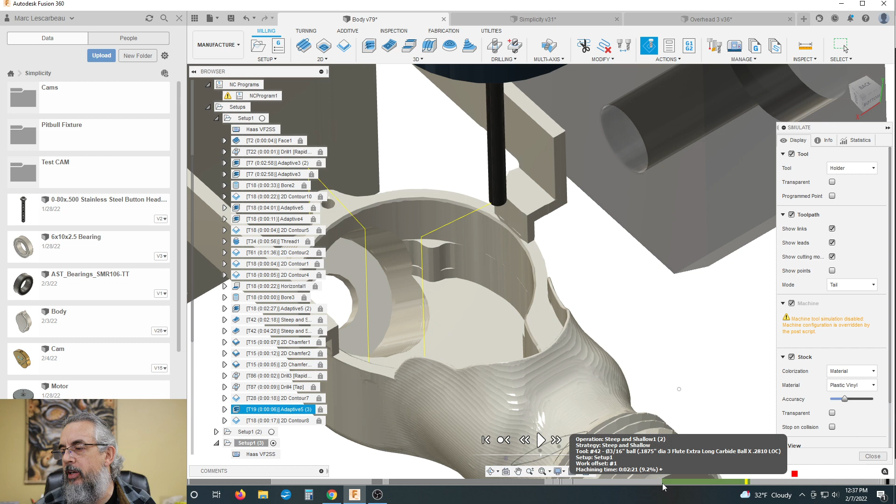That's its only job. But after all of the material's been removed, the last operation I'm using is a bigger tool to come in and take these relatively, I won't say thick, about a millimeter actually, about 40 thousandths of an inch right now, but that's more than enough to stabilize this for the light cuts I was taking. And then what I do here with the last tool, you see I come in and I just cut those down to paper thin.

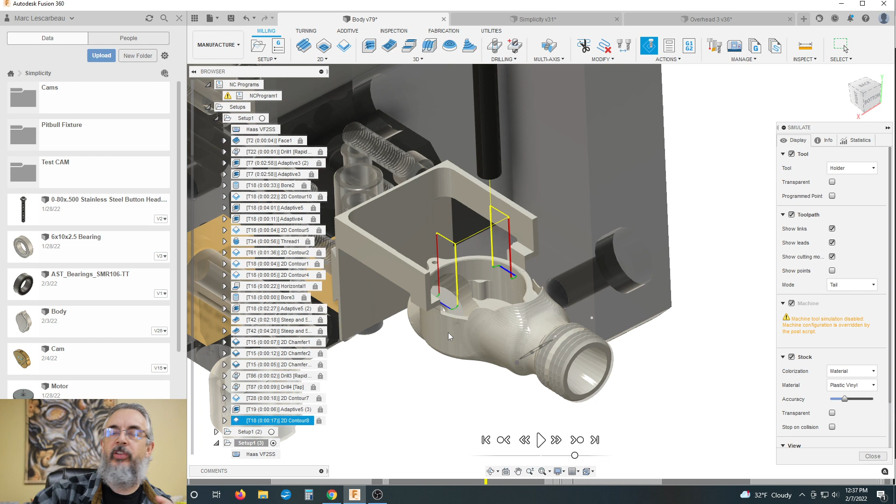That's thinner than a sheet of paper, but it keeps the part from falling off or moving, or if one side dropped, deflecting into the tool, creating a bigger problem. So it just holds the part onto this mount, I guess we'll call it, and that will stay suspended in there, and that will just continue to ride around on the tombstone while the operations for the other parts are completed.

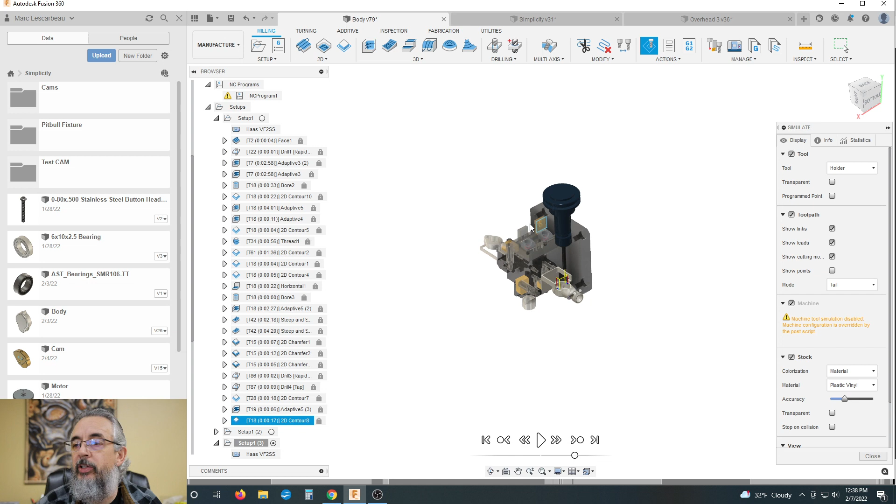And that's that. So when it all stops, operator reach in, grab that body, snap it off, grab the cover, snap it off, snap off the cam and the mount, load the blank chunks from the dual jaw vise on the left into the tombstone, a couple small blanks of aluminum and brass into the mini vises there, and press go.

And after he presses go, he will then turn around and do a little bit of light sanding on the faces to remove the remaining tabs off of the finished parts, and then they're ready to go into the mass finishing machine and all eventually off to anodizing. So that's where I'm at. I hope you like the new version of the machine.